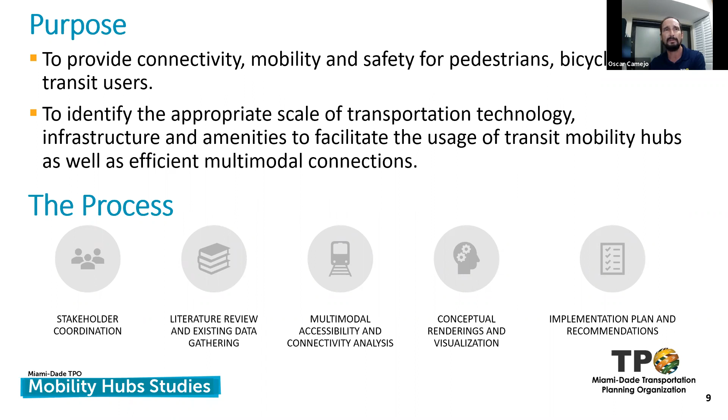The purpose of these studies is really to provide better connectivity, mobility, and accessibility for transit users to connect to these stations. We looked at these in depth. We did on-site visits. We had stakeholder coordination for both of these efforts through study advisory group committee meetings, three for each one. We reviewed existing literature—there's been plenty of studies done along the bus rapid transit for several years now, since they've already broke ground, and hopefully construction will be completed by the end of 2023. We looked at multimodal accessibility. Conceptual renderings and drawings will be presented towards the end, along with implementation and recommendations plan. Next slide, please.

Public outreach. We had to get really creative this year, of course, because of the pandemic. Typically, when the scope was written, in January of last year, the way we were going to receive input from the community was to have a person standing at the stations with tablets, and people would answer questions that we inputted and these would directly be made part of the survey results.

We had fact sheets which were distributed to the Study Advisory Group Committee, which in turn disseminated the information. The surveys were available online. If you see in the lower right of the bus shelter poster and on other documents, there were barcodes that one could scan. You don't have to touch any paper, and it would take you right to the online survey.

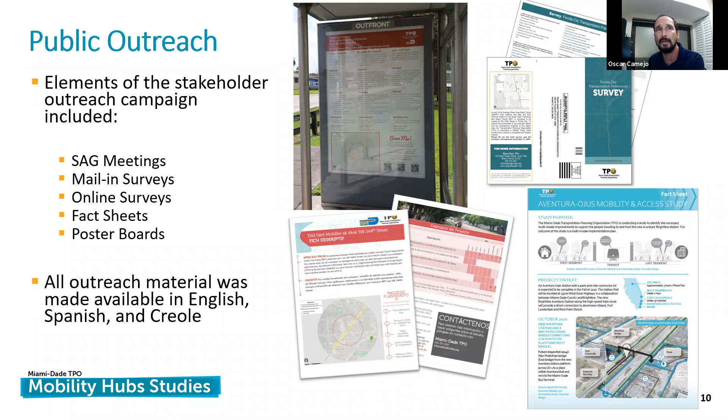We also had trifold brochures that were distributed at different locations, in libraries and in Florida City, at the mall, electronically in that case, for persons to submit their comments. And all this documentation was available in 3 languages: English, Spanish, and Creole. Next slide.

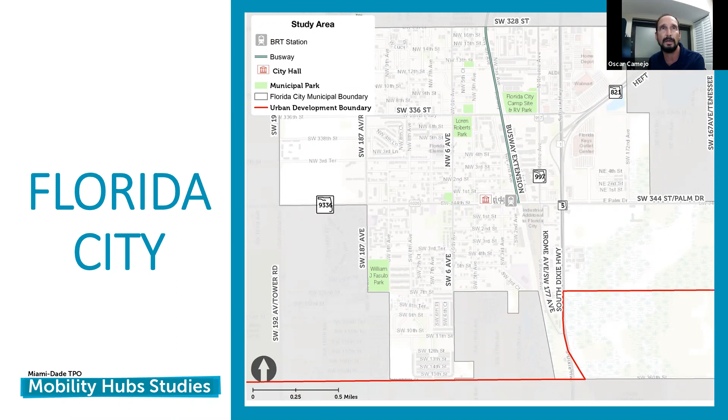And here's just a map. It's kind of gerrymandered how Florida City is built. The white area is the incorporated city itself. And of course, the shaded area is unincorporated Dade County. Next slide.

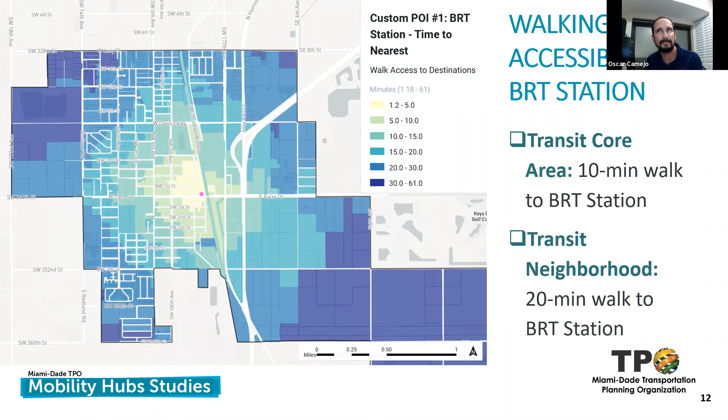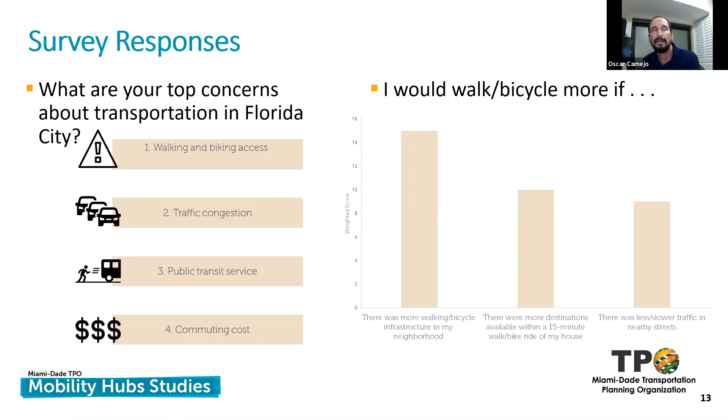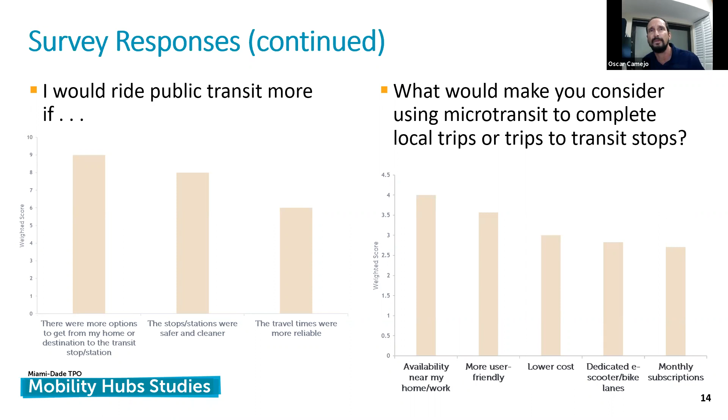However, availability was the top on the list. Being more user-friendly was second, with lower cost third, and dedicated e-scooter bike lanes and monthly subscriptions coming fourth and fifth, respectively. Next slide.

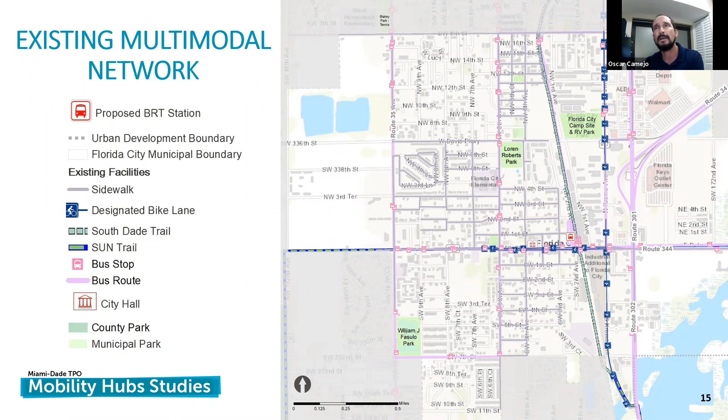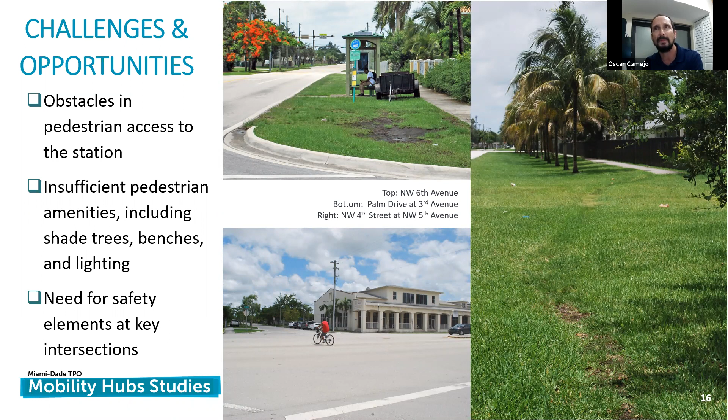On the upper left-hand corner, it was pretty interesting as we walked across. It's very hard to tell in this picture, but you see the grass is burnt a little bit right just to the left of the grate. The chain link fence is actually missing there. People have taken it down. And yeah, exactly. Thank you, Lisa.

And that's where they've also created a pathway to get to the busway instead of walking all the way around. And that's one of our recommendations, to make that a safe connection there, so they can access the trail, or the bike trail, and or the station itself. On the lower left, you see there's no sidewalks.

On the right-hand side, the larger picture, that first driveway is where the buses exit the terminal. The further driveway is where the buses enter the terminal. And you can see there's the dedicated bike lane there. And this is pretty much towards the very end of the busway.

And you can see a nice pothole there that's pooling water and some broken debris, and the striping is relatively poor. It's really faded. So there's a lot of challenges, opportunities here to complement the existing network and to access the station. Next slide.

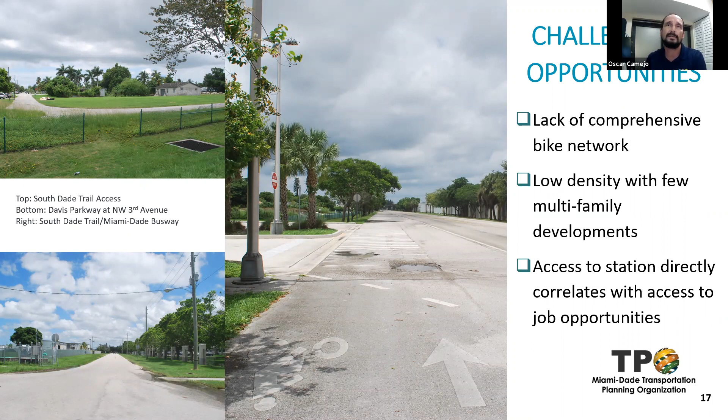These are what's recommended as a result of this study. The proposed bicycle route, which is the little green boxes, to make it easier to access the station and make it more accessible to communicate within the area. We have the BRT station, which exists, but is of course the old style with the simple terminus.

The yellow lines are recommended new sidewalks on one side. The orange lines are recommended sidewalks on both sides. So as you can see, there's a lot of gaps there that need work in Florida City to make it easier for people to connect to this station. Next slide.

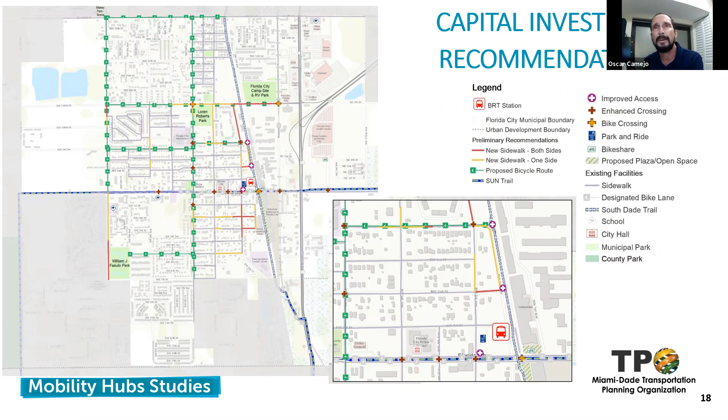We divided all the recommendations into 2 terms, short term and midterm. Short term being 1 to 2 years. And these are rough estimates of what it would cost to make these improvements. As you can see, there's quite a few, totaling roughly $1.5 million, the majority of them being sidewalk improvement projects.

Some of them are bicycle and intersection enhancements and multimodal accessibility, for a total of 28 projects for the short term, 1 to 2 years. Next slide.

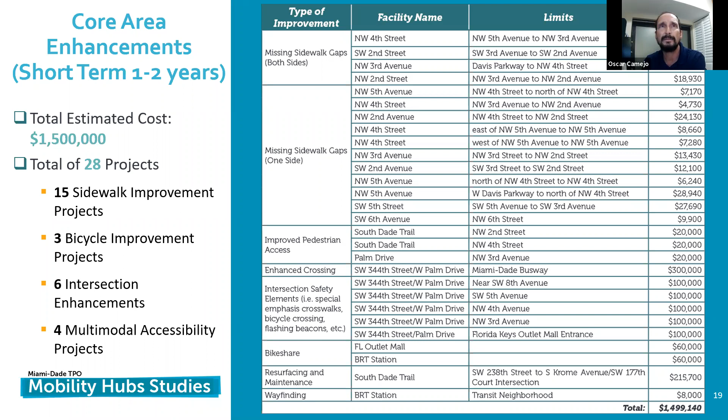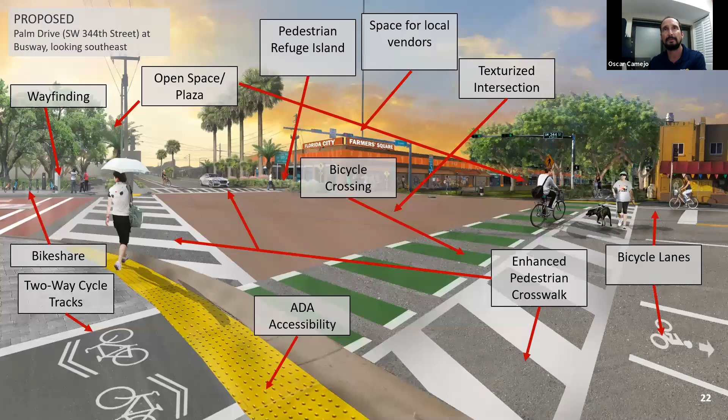this is a superimposed rendering of what it would look like with all the improvements. And you can see the little squares indicating what exactly the improvements would be. Now, I know FDOT has raised concerns. As you can see, the green striping that goes across Southwest 344th Street to Palm Drive would have to be specifically permitted by the state.

Because on state roads, there are certain AASHTO standards that have to be met, and there could be exceptions made for this. Other than that, everything else is something that could be done, hopefully in the near future. Next slide.

And this is what it would look like, just removing those boxes to make it a little less busy. Of course, the Florida City Farmer Square does not exist. It's something that I think the residents and everyone would enjoy in that area. And not too far from there, there's actually a farmer's agricultural depot, so to speak. Next slide.

This is north of the study area. This is looking east on 4th Street. As you can see, towards the background there already is a dedicated connection so people can cross there. If you can show the next slide.

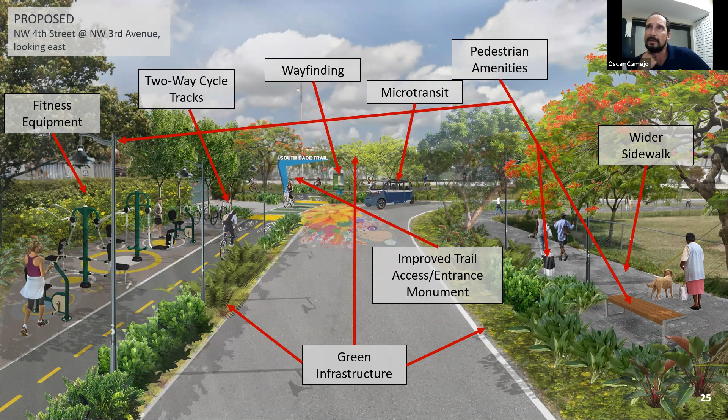This is what it would look like, of course, without all the improvements shown in little squares. Next slide. Now this is the second of the mobility hub studies. This is Southwest 244th Street, which is also called the Princeton area. This is unincorporated Dade County.

Oscar. Yes. Through the chair. Since this is a separate project, do you want to see if there's any questions for the first? Sure, whichever way you guys want to run the meeting. For the first part? That's probably a good idea, especially since I think Edward's going to have to go soon. If anybody has questions at this point, raise your hand, I'd take the CTAC members first. Well, let's go with Edward. I know you're going to have to go soon, so let's go ahead and take your question.

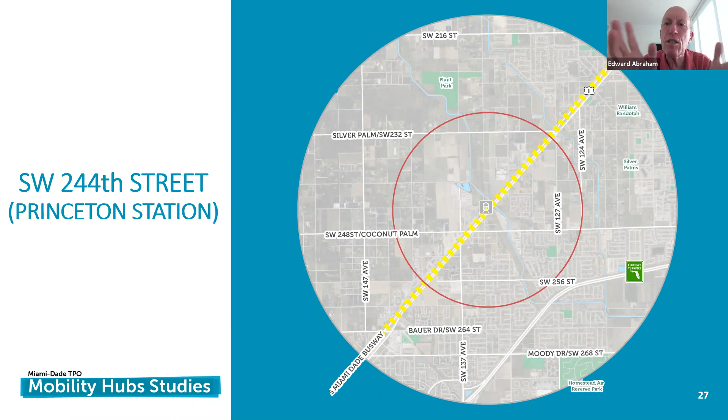Thanks very much. I just had a question about the bicycle lanes. I guess there are two different things. This is all within budget. In one case, there were clearly physically separated lanes attaching to the bike trail. And then in the other picture, it looked like there were designated bike lanes that were painted. Is that going to require road widening as well? Or the way the renderings are shown, that's with existing.

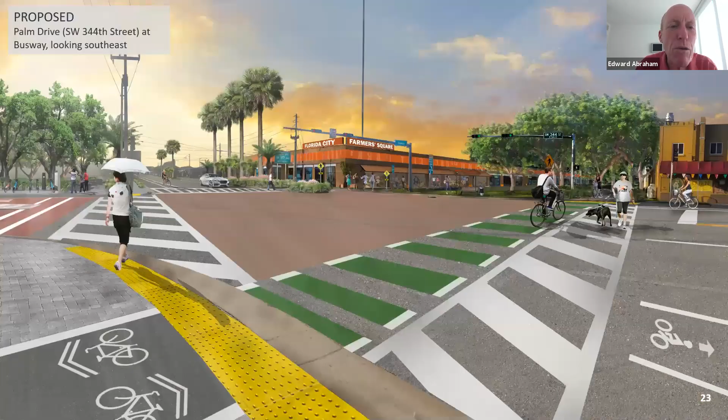Okay, but you showed that one, I think 4 slides back, not this one. This was very impressive. Go back one more, no, a couple, yeah. Yeah, this one, and then there was, I thought, one just before it. I guess that's right. So the bikes coming down both of these, it's just taking up additional space from existing roads, or is it widening the roads to have the bike lanes?

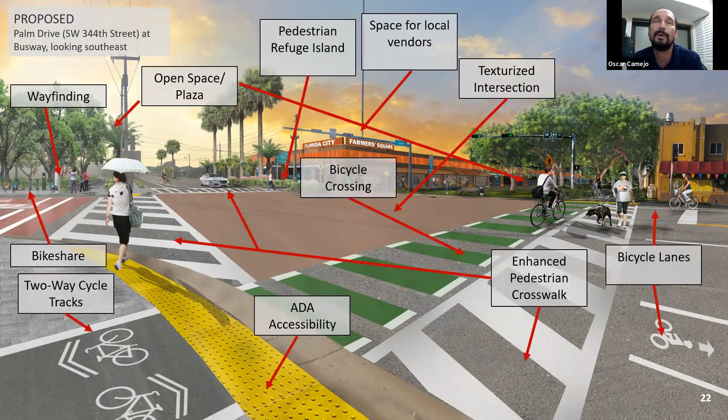This is using the existing roadway. This is not widening either the busway road terminus or Palm Drive. That'll remain as many lanes as it is there. So this won't affect traffic flow. It'll just create additional designated space for the cyclist. If you go to the previous slide, Lisa, or I'm sorry, the one more before that. There you go.

You see the lanes, it's just a painted lane for the bicyclist there. Right. And then you have the striping. Yep. But the number of lanes remain the same. I think you have 2 lanes going west, and if you go 2 slides over, you still have 2 lanes going west, and it's mostly more of a striping. Okay. It's an impressive difference, and it looks like there's more space, but clearly it's just because of how it's painted and designated, right? Great, thank you. You're welcome.

Okay, Susan Shine, can you unmute? At the beginning of your talk, you mentioned you were taking surveys at 8 or 10 bus stops, and it was a total of 18 locations. Out of how many in total is that? Does that represent the entire public transportation area or just a portion of it? That represented the whole area. As a matter of fact, I think we went outside of that area on a few of those bus shelters. We just did Florida City. They were all either within or just outside of it. Okay, thank you.

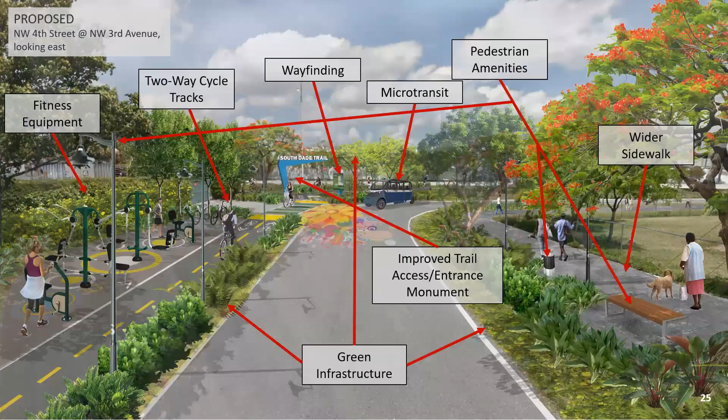Okay, so now we can start off with the Princeton area of Southwest 244th Street, which all falls within unincorporated Dade County. And this is a little simpler in the sense that it was a radius approach. You had the 1 mile and a 2 mile radius where we conducted this study. Next slide.

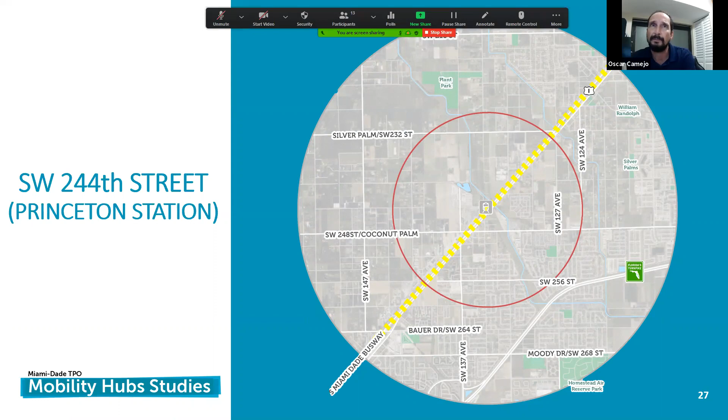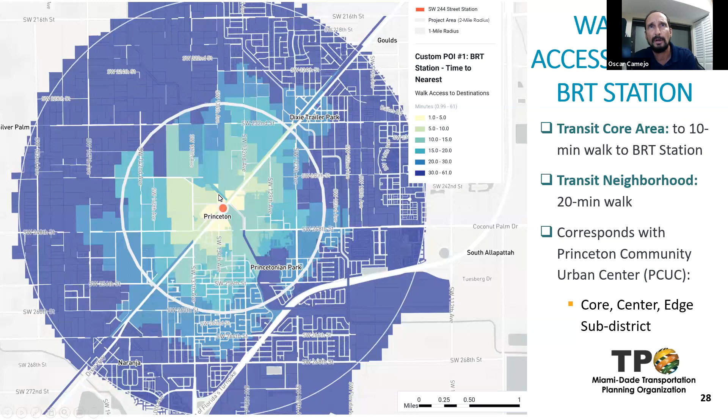Similar to the other map, this one indicates the walking time it would take you to get to this Redland Market or Southwest 244th Street. Of course, as you go further out, the longer it takes you to walk. And there's a canal also there. It's a diagonal canal that intercepts this, and that's why you have a clear demarcation of colors exactly where the arrow is. Next slide.

As a matter of fact, we had a really good return on the responses for Southwest 244th Street. It was really a grassroots effort. We worked with the Redland Market Village, Mr. Jose Infante, who was an incredible help, and we really thank him for being involved with this effort. And we had 201 survey results for Southwest 244th Street. And these are the results of those efforts.

As you can see, the top concern was people felt a little unsafe or uncomfortable with walking and biking conditions, much more than half. The second was traffic congestion, and then inadequate public transit along with the high costs. People would walk and bike more if there were more walking and bicycle infrastructure. This is almost half of the population. That was their top concern.

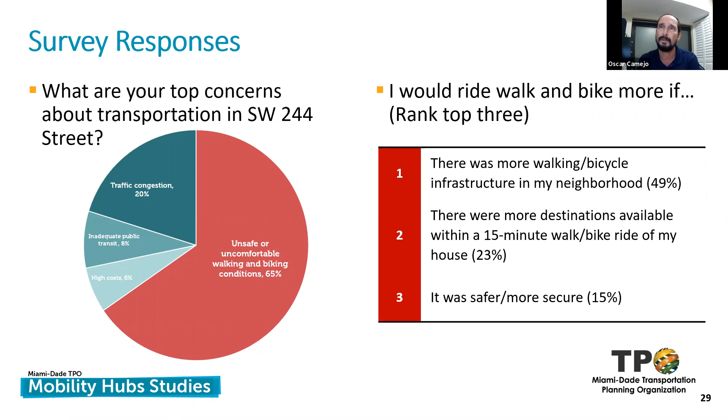And there are also more destinations. Both these surveys had the same options, just different areas, and that's why you're starting to see a similar pattern here. If there are more destinations to go to within a 15-minute walk radius, they would bike or walk more. And if it was safer. Next slide.

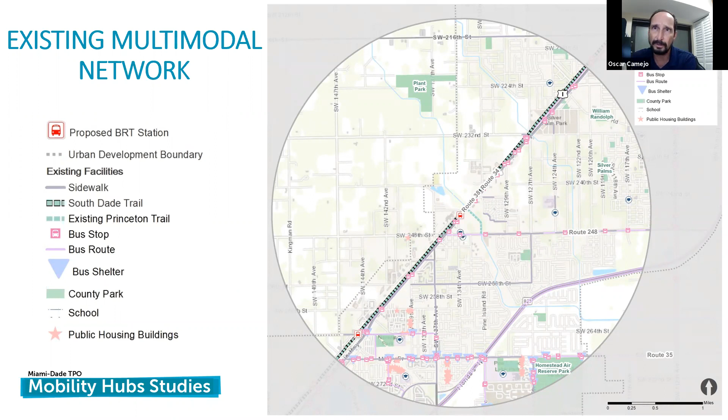This is the existing network. As you can see in this case, it's just a straight diagonal line running right through it. That's where the busway goes. The main street there is the intersection of Southwest 248th Street, but the station is going to be at Southwest 244th Street. And you have buses that go along there. You have bus routes, sidewalks, and of course the South Dade Trail, which is really long, goes along there on the busway. Next slide.

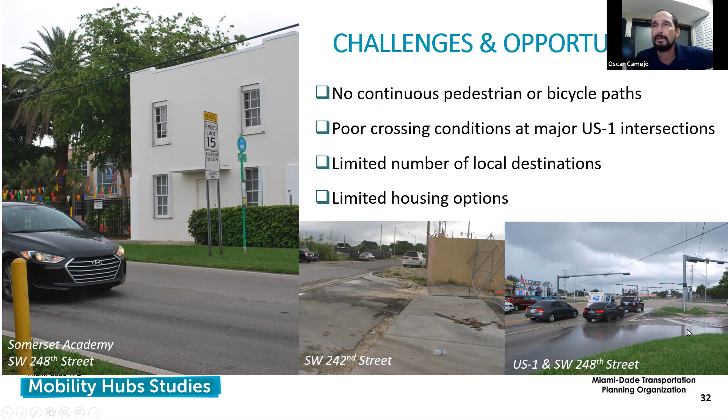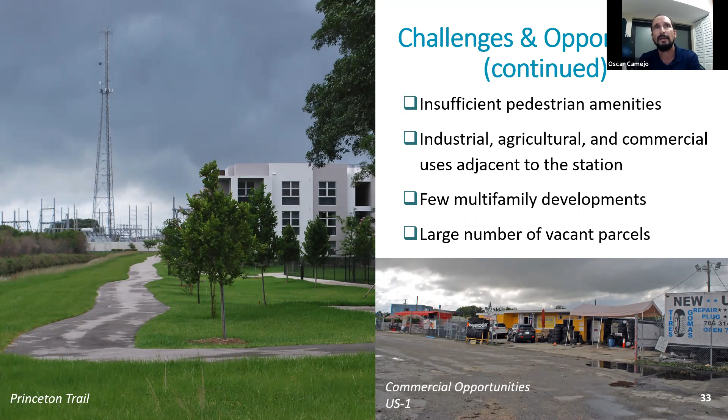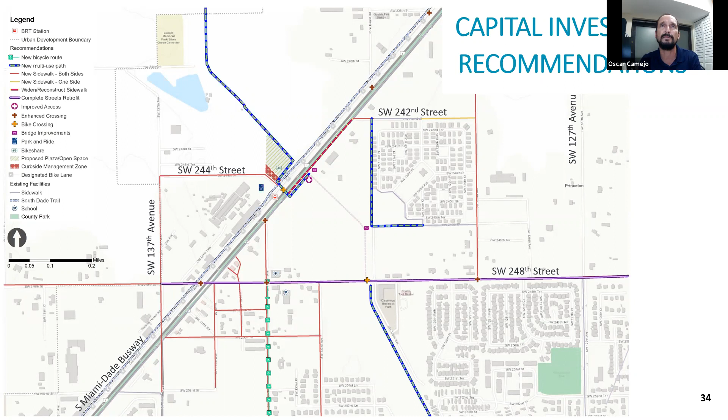These are the recommended capital investment strategies. That blue line is a new multi-use path. There's no disconnect there, it's just because that already exists where it tries to cross from 244th Street. Improving access right on 244th Street. As you cross the street, it's a dead end railing to a canal. And there's communities on the other side. And even comparing our site visit to Google Earth, it's huge how much building is going on, construction, on the south side of US 1 for multifamily dwelling units. Next slide.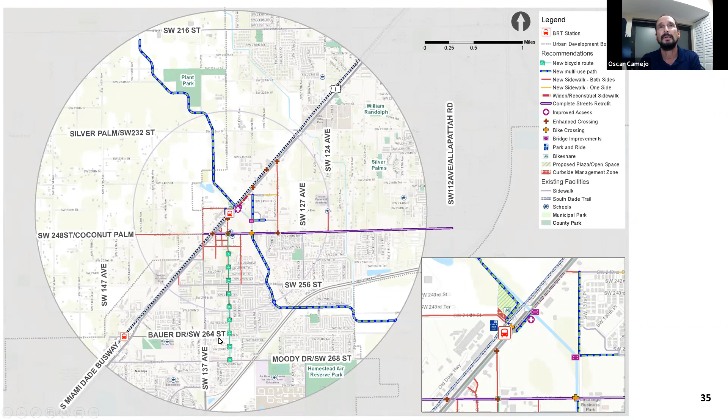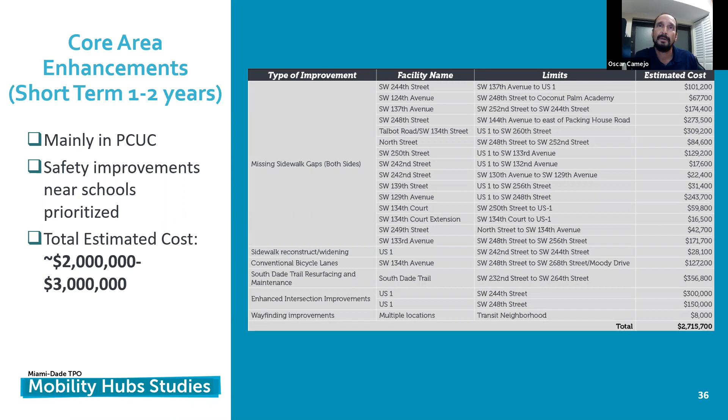And this is the study area where the recommended improvements are to be made. You can see the little green squares are the new bicycle routes that connect from Palm Drive south. Next slide. These are the 1 to 2 year short-term improvements. This is a little higher than Florida City at $2.7 million. As you can see, there are many sidewalk gaps, which is most of it. Next slide. And these are 3 to 5 year improvements, which is $3.3 million roughly. Streetscape designs, large scale investments. Again, a lot of sidewalk gaps that are missing. Crossing treatments to make it safer for a person to go across, the pedestrian island and so forth. Next slide.

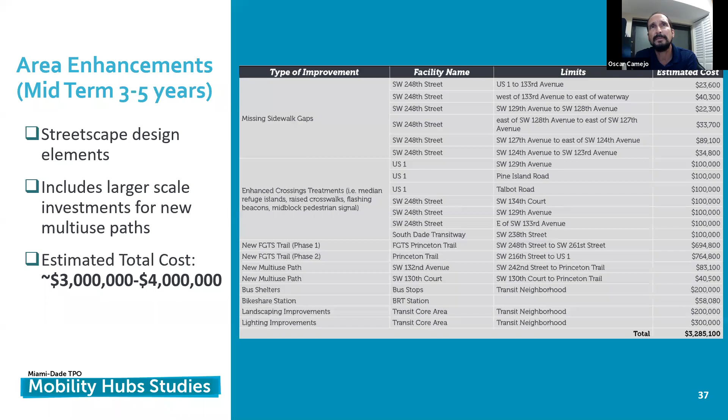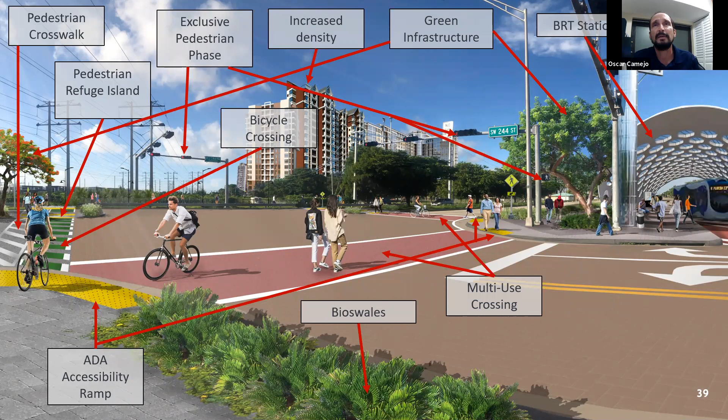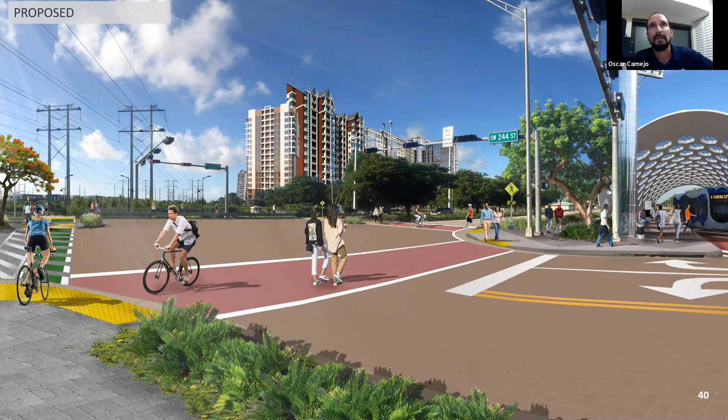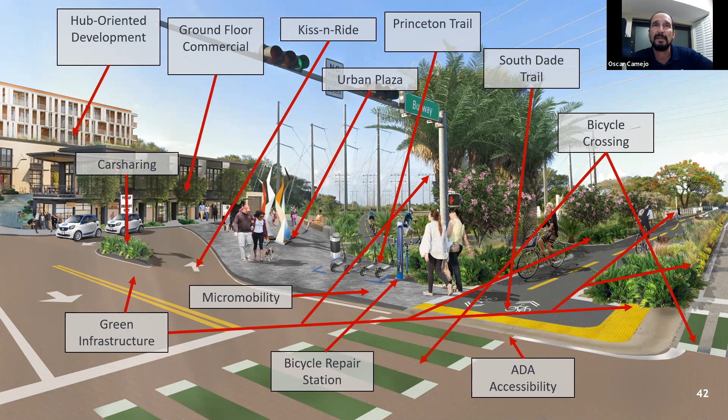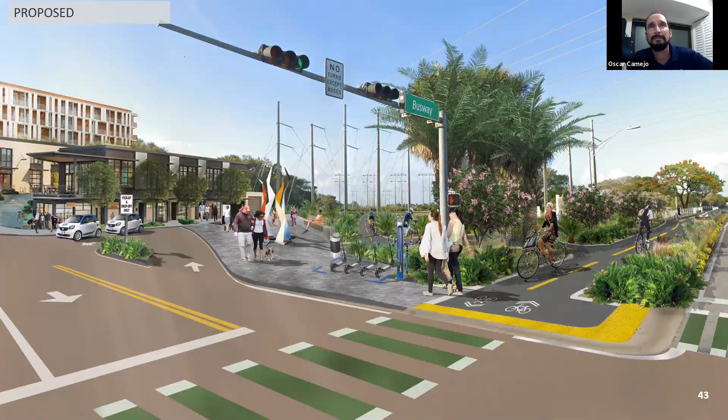Okay, so we're going to TPC next Monday with the same exact presentation for these two mobility hubs. We are seeking funding opportunities, as I mentioned earlier, which is one of the questions raised. Florida City is competing for TA funds for the full report recommendations. Unfortunately, I couldn't get a sponsor in time. For unincorporated Dade County, we're looking for a sponsor there, either Parks and Recreation or DTPW, to see if we can get some funding from them. And we'll be working with the implementing agencies to hopefully get these recommendations initiated and implemented to make this a more user-friendly and accessible station for bicyclists and pedestrians. Next slide. That's it.